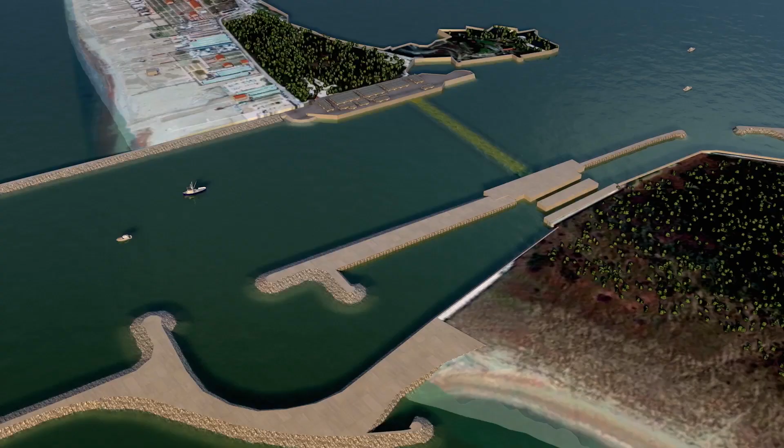For the last 30 years, engineers have planned one of the most ambitious moving dike projects in the world, dogged by indecision and scandal. Today, the MOSE, the mobile seawalls the city never needed in the past, are almost ready to be used.

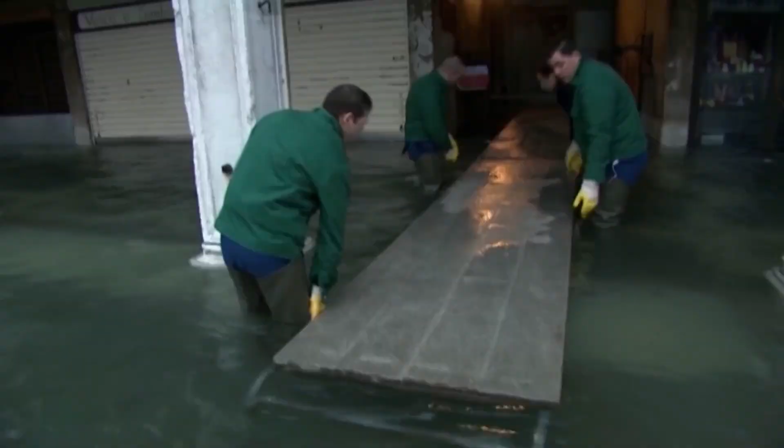The architectural treasure that is Venice is threatened by the very element that made it prosper in the past: water. Its position and wealth have been its ultimate downfall. With a dwindling population, the city is literally being broken down by tourism and climate change. But saving Venice has become a World Heritage priority, and billions are being spent to stop the rot.

Over the last century, the once proud city of Venice has suffered the humiliation of a declining population, the invasion of new barbarians dragging trolley suitcases up and down its streets. Huge cruise liners, whose wake flattens the lagoon sea floor.

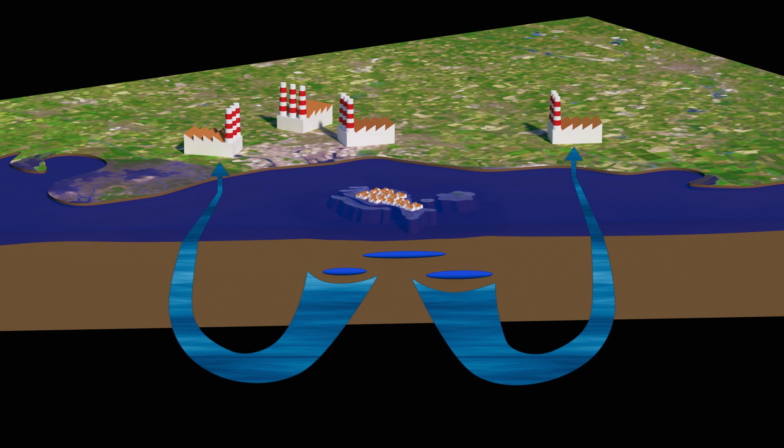And periodic flooding by the waters of the lagoon itself, as overuse of the subterranean aquifer has caused the city to subside. In adverse wind and tide conditions, the Adriatic Sea pushes into the lagoon through the 3 openings of Lido, Malamocco and Chioggia, and raises the sea level just enough to flood the streets and homes of this ancient city.

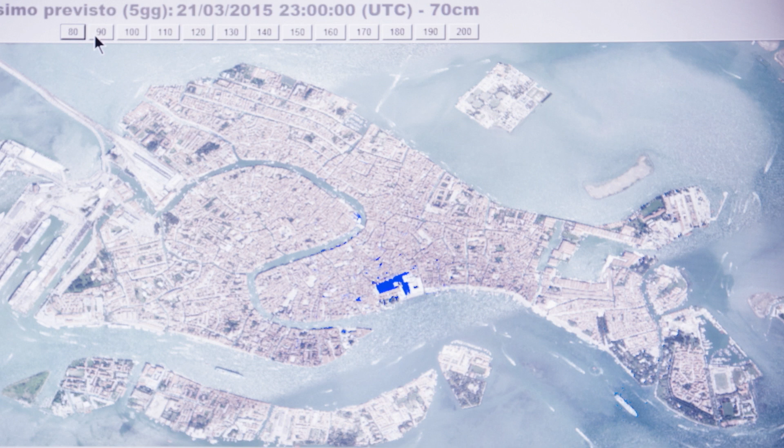Some tourists may find the flooding of St. Mark's Square fun, but the heart of the most romantic city in the world is also the lowest point of Venice, and the flooding causes inestimable damage to the foundations of St. Mark's Cathedral, one of the most ancient in Italy.

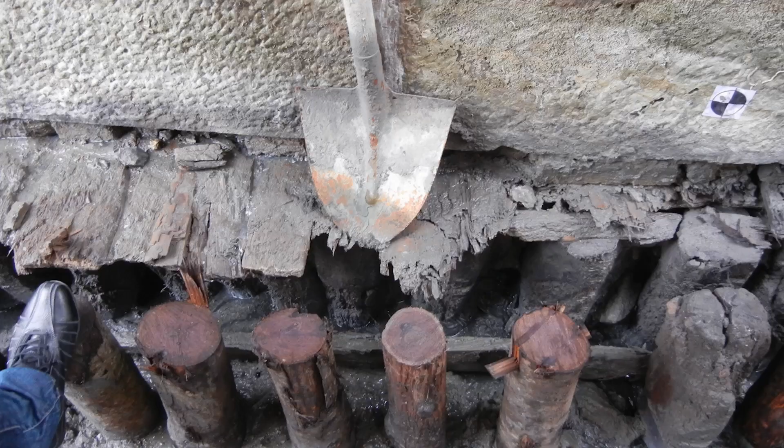Once the water rises above the level of the special marble used by the engineers who built the city over the centuries to provide insulation of the brickwork, then the facades of the buildings begin to suffer dramatic erosion. These buildings are designed to be light, as they stand on millions of wooden piles, so any damage to the brickwork can cause structural damage too. The high waters are eroding not just the foundations of the city, but some of the world's most beautiful works of architecture.

The lagoon is an ecosystem in danger. Not only the city, but the hundreds of islands and wetlands that make up this unique landscape risk being lost forever, with the added complication of rising sea levels.

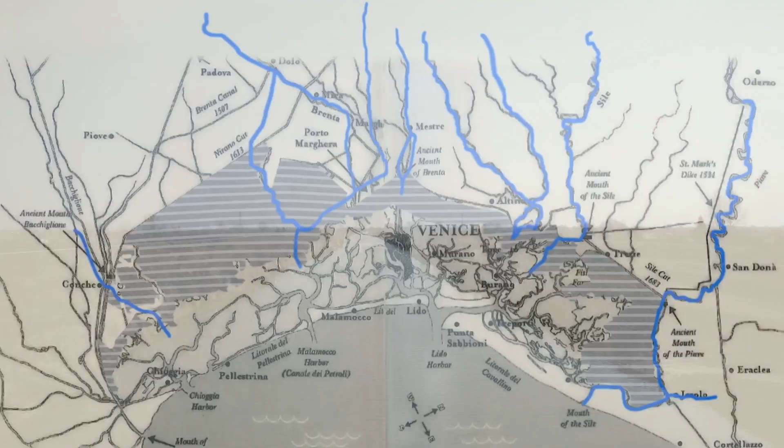Bounded in the north by the river Sile and in the south by Brenta, for centuries the Venetians fought a battle to stop the lagoons silting up, even deviating the course of inland rivers. Access to the sea was Venice's source of power, and the lagoon was its natural defense.

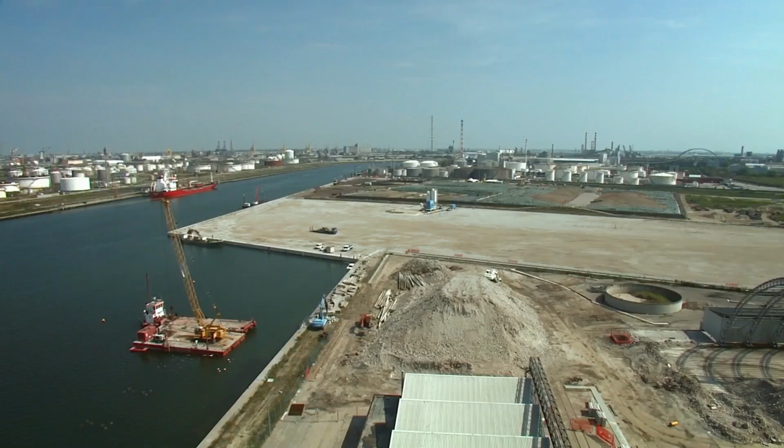In the last 30 years, the situation has been reversed. Trade now goes to Marghera, the city that drained the water table, and the sea has become a threat. The walls of Venice are the massive floating barriers that will stop the sea from flooding Venice.

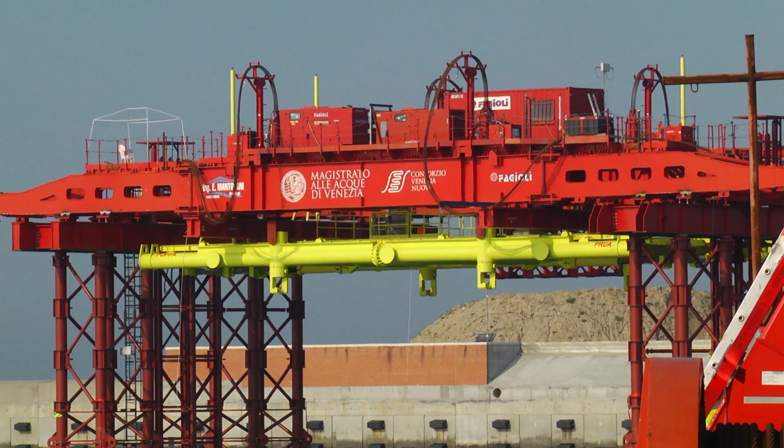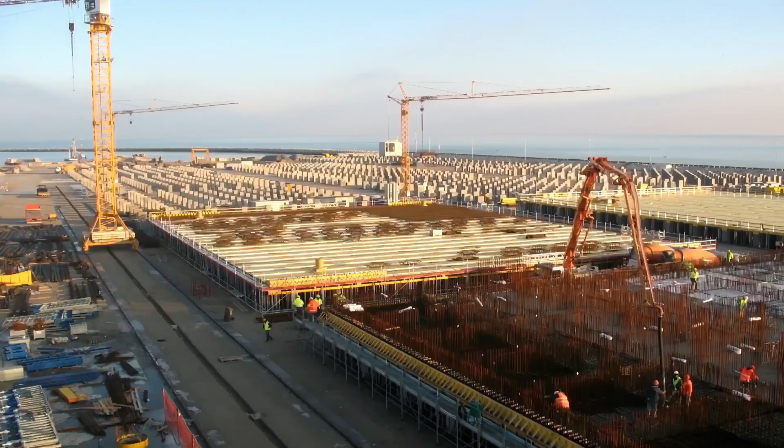Giovanni Zarotti is the lead engineer on the MOSE project. He has seen it grow over the years and now heads up the team that will bring it to fruition. The new Venice consortium of Venetian enterprises has come together to build the MOSE, or Modulo Sperimentale Elettromeccanico, the floating walls that will defend Venice from high waters.

MOSE is a project that began after the events of 1966, with the exceptionally high tide that caused flooding of huge parts of Venice and massive damage to the city's cultural and monumental heritage. As a result, there was significant intervention to create an infrastructure to control medium-high tides, meaning tides that reach 1.10 meters above average sea level and can go as high as 1.94 meters, as happened in 1966.

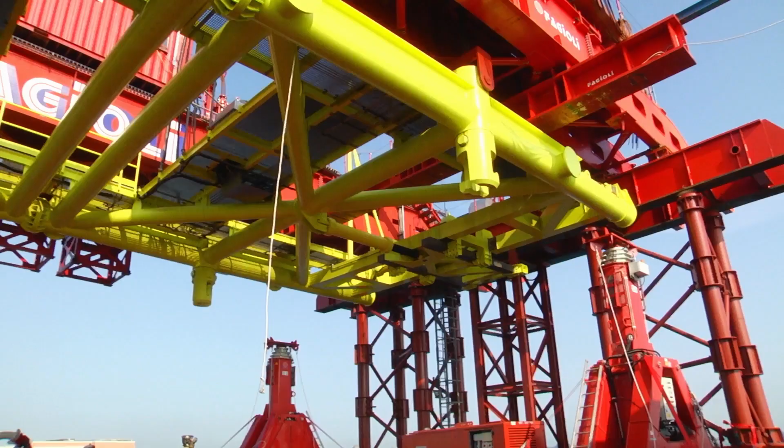Moving the massive engineering parts that make up the MOSE fell to one of the world's leading heavy lift companies, Fagioli. In 2012, the company was engaged by the new Venice consortium to lay the floating barriers and concrete housings that cross the Lido entrance to the lagoon. It was the beginning of the final phase of the MOSE project.

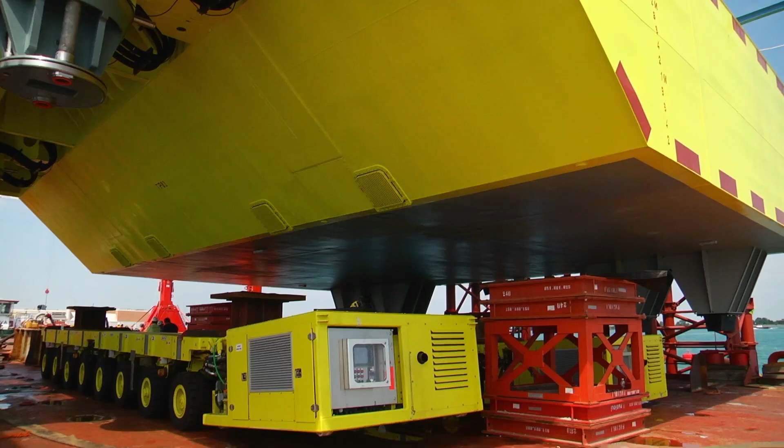However, the Malamocco and Chioggia entrances required extra engineering, as they are even deeper and wider than the Lido entrance. Fagioli's engineer, Tommaso Favaretto, was the lead engineer on the project.

As compared to the previous operation, we added horizontal elements, crosshead beams. We lengthened them to allow us to cover the geometric parameters of the walls of Chioggia and Malamocco. They weigh more and are larger than the Lido Treporti walls. Here we're talking about 400 to 450 tons of weight to move over several tens of meters in length.

The MOSE is one of the largest works of civil engineering built in Italy. Over the last 10 years, it has provided hope that the city can be saved from sinking under the waves.

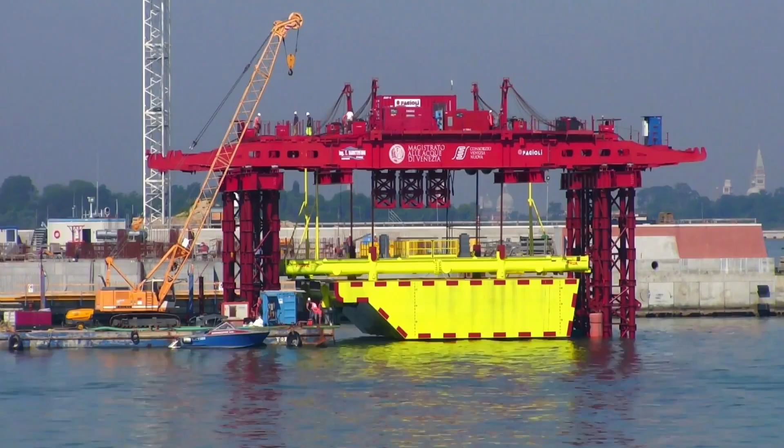The world waits with bated breath to see if the walls of Venice will actually save the city. The project is one of the most complex works of civil engineering ever built in Italy, designed to save the city from periodic flooding.

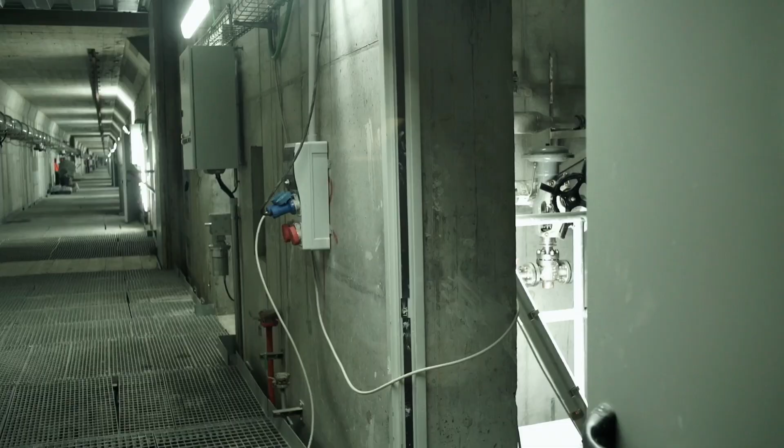The works were officially launched in 2003, and a lot of the work, most of which has already been finished, were works of civil engineering. So, for example, the concrete housings that form the base of the work and the housing for the walls, consolidation work, and the essential infrastructures that the whole project needs, located at the lagoon entrances.

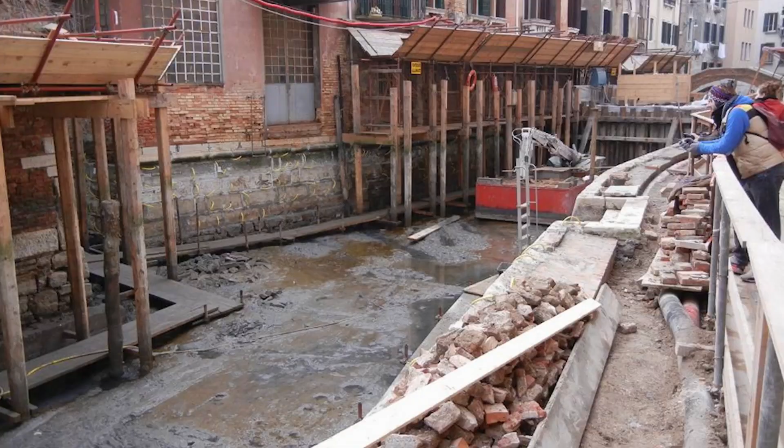The Venice Lagoon is 80% made up of wetlands that are partially submerged, and only 8% is made up of islands, while the city of Venice is actually held together by millions of wooden piles pushed into the mud and sand.

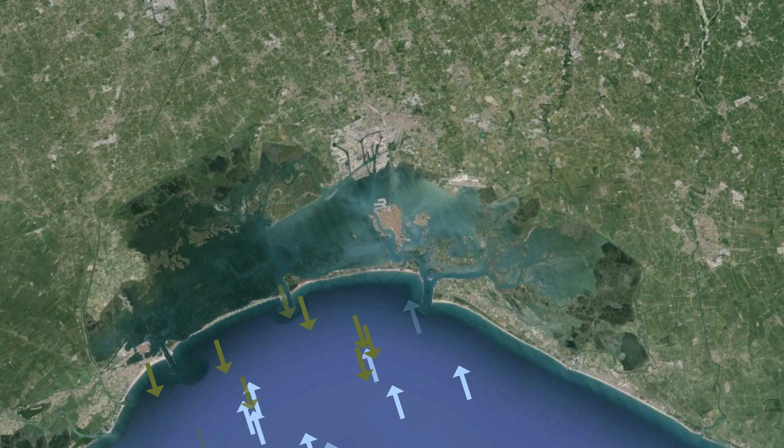The tides that so threaten the city are also its only real drainage system. Twice a day, clean water enters the canals and dirty water is taken away. As a result, there were several prerequisites for the MOSE that the designers undertook to respect, not only to maintain the overall visual aspect of the lagoon, but also to ensure free exchange of water between it and the open sea.

So we began the planning process, but the Italian government set a certain number of prerequisites for construction, and there are two main ones: that the construction should have a low visual impact and should not greatly modify the overall aspect of the lagoon. The second was that it should not substantially change the hydrodynamic exchange between the open sea and the lagoon. Later, the plan involved restoring the natural ecosystem that contributed in the past to slowing down the flooding process.

Access for ships and seawater into the Venice Lagoon is through three openings in the long sandbank that makes up the barrier with the open sea. The openings are at the Lido of Venice, at the small fishing village of Malamocco, and in the south of the lagoon at Chioggia.

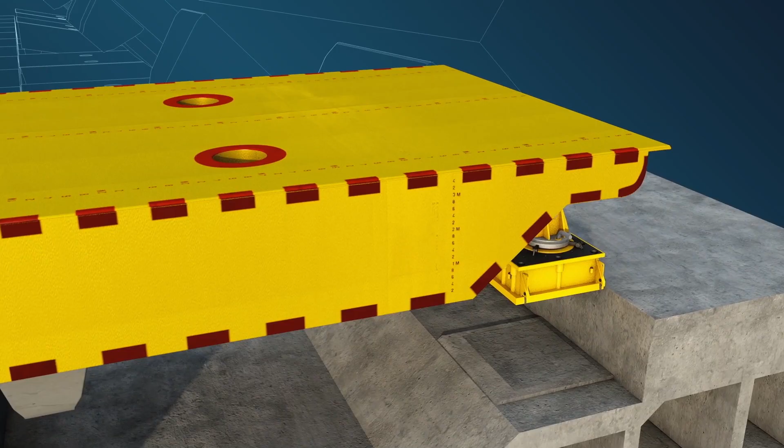The MOSE concept is based on a system of floating barriers to close these 3 openings when adverse wind and sea conditions are forecast. They are massive steel walls that can be filled with compressed air when necessary, rising to the surface, making a floating wall.

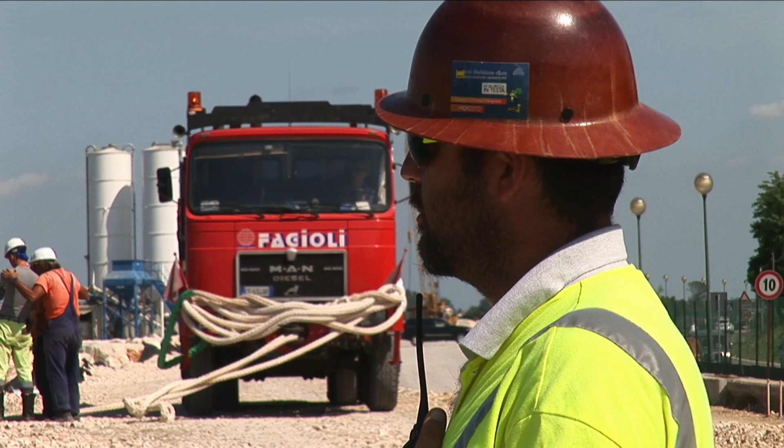In 2013, the first mobile walls were installed at the Lido entrance to the lagoon. This entrance was so wide that it was artificially divided into 2 to allow easier management of the massive structures.

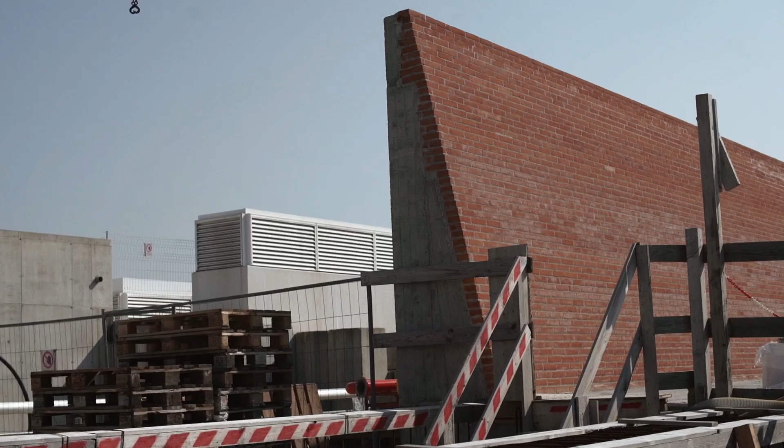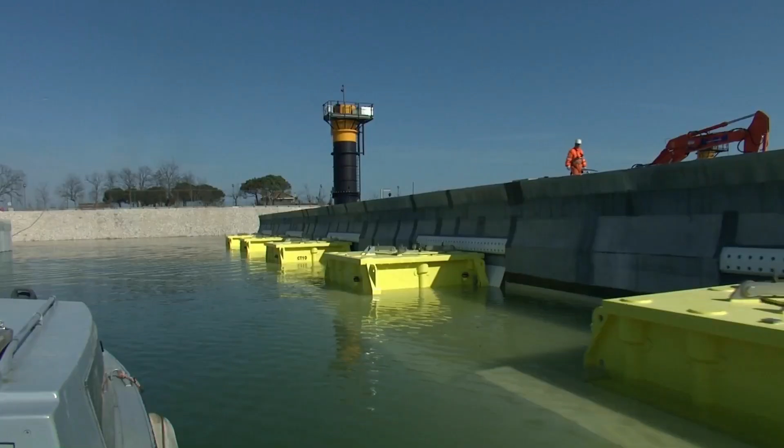In these extraordinary images, dating back to the first campaign to lay the caissons, the concrete housings for the barriers, we see the area where the housings were built being flooded. One by one, the caissons were pumped with air and floated.

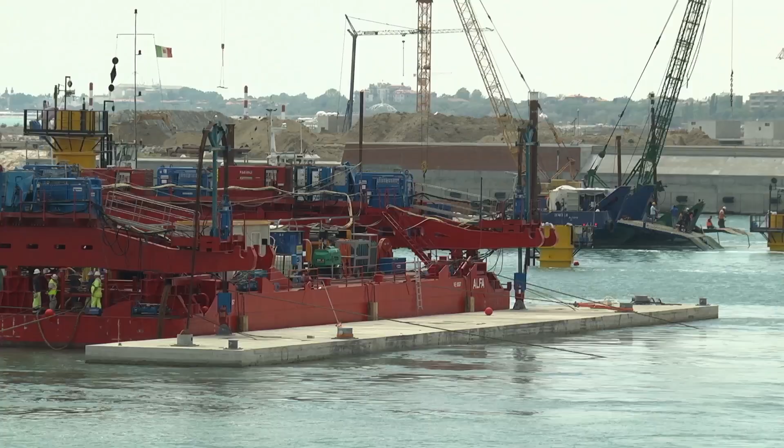Fagioli used a special catamaran to position each 12,000-ton concrete housing over the 12-meter deep trench dug into the sea floor, where 4 300-ton capacity strand jacks lowered it onto bags that were slowly emptied to provide the soft landing needed for absolute precision.

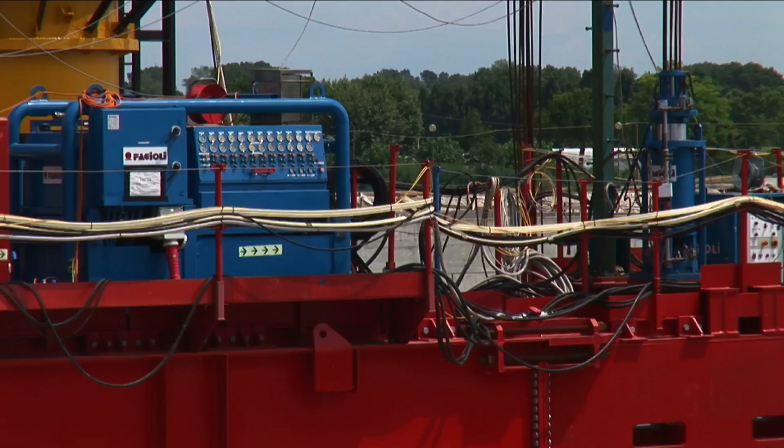The exact location of each caisson was guaranteed using GPS positioning and radar. It was one of the most complex moves Fagioli had ever carried out.

The housings were prefabricated in an area that was drained of seawater. So they were built on the bottom of the sea, and they are cellular housings, made of concrete walls, but partially empty inside, so able to float.

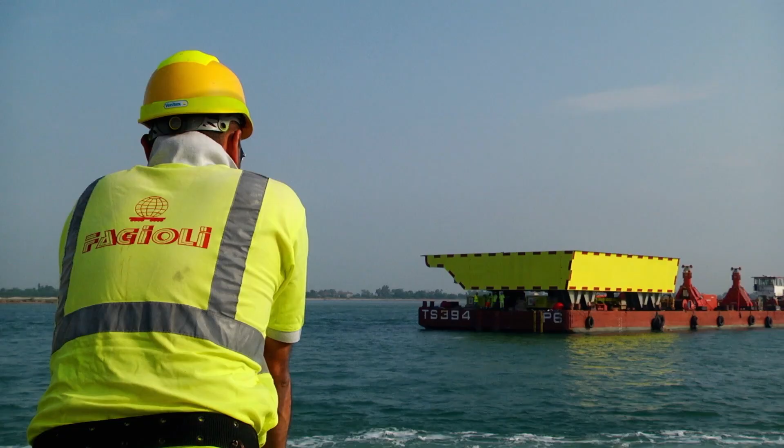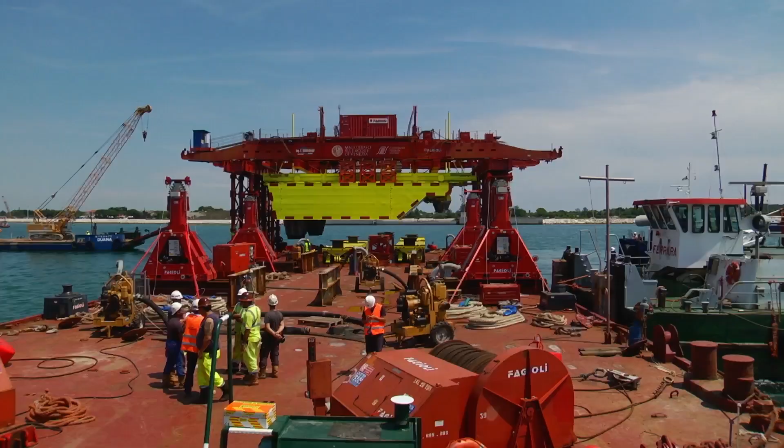Then the walls themselves were laid. They weighed 210 tons. They were floated out to the location above their concrete housings on a barge, and then lifted by a specially designed gantry crane and lowered into place so that they fit perfectly onto the hinges.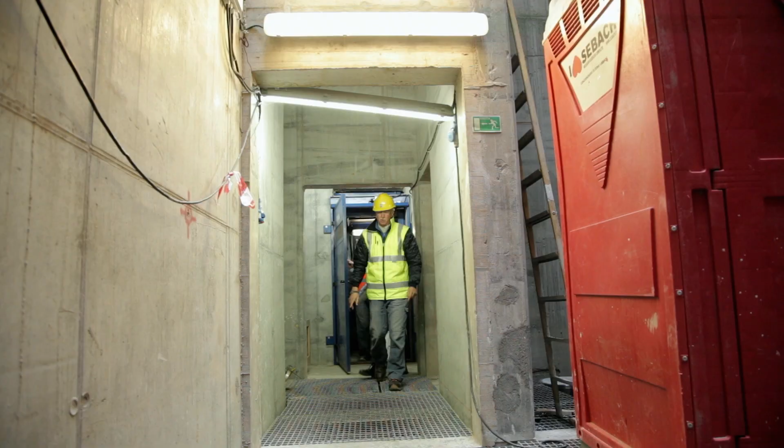In a rare visit to the underwater bunkers, located more than a dozen meters under the surface of the lagoon, the actual configuration of the concrete housings for the mobile barriers can be seen. A tunnel with lifts at each end allows for regular inspection of the hydraulics and electric systems that are at the heart of the MOSE.

Each hinge is housed in its own room with watertight access doors. A reserve tunnel ensures there is access under all conditions, even when the bunker-like construction is flooded.

Malamocco is a pleasant fishing village on the strand that separates the Adriatic Sea from the Venice Lagoon, and is also the place where hundreds of ships pass through every year to get to Porto Marghera, the great industrial and petrochemical hub of northern Italy.

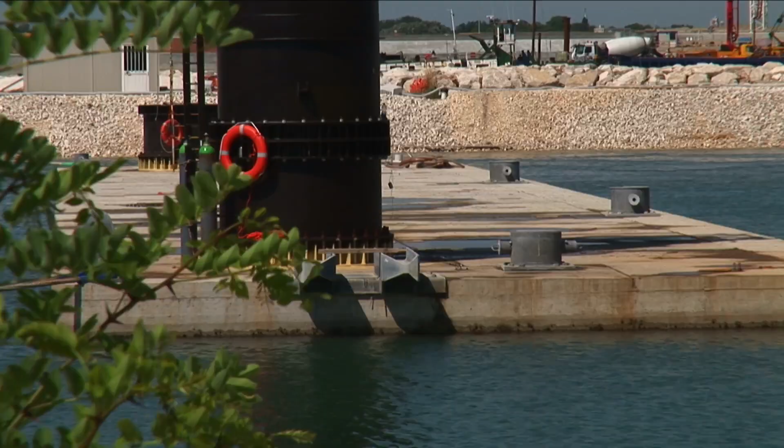The channel is particularly deep, and the caissons, or bunkers, were built close by as they were particularly heavy. While at Lido, each of the caissons is able to house 2 barriers, here each concrete underwater bunker houses 3.

At Malamocco, the system used was different, although the housings were essentially the same. They were built on a bank above sea level and then moved via a system of rollers and taken to the synchrolift, a kind of massive elevator that lowered them into the sea, and then they were floated away and tugged to their final destination, and then sunk again.

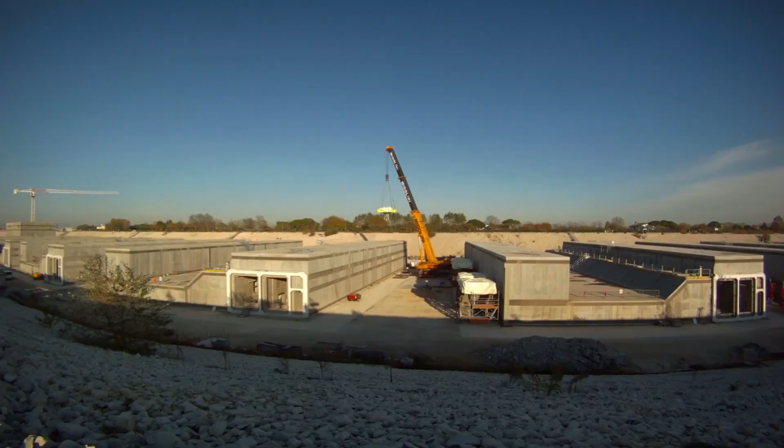Building such a huge work of civil engineering was easier said than done. The concrete structures built at Malamocco first had to be lifted and then moved onto the huge synchrolift crane.

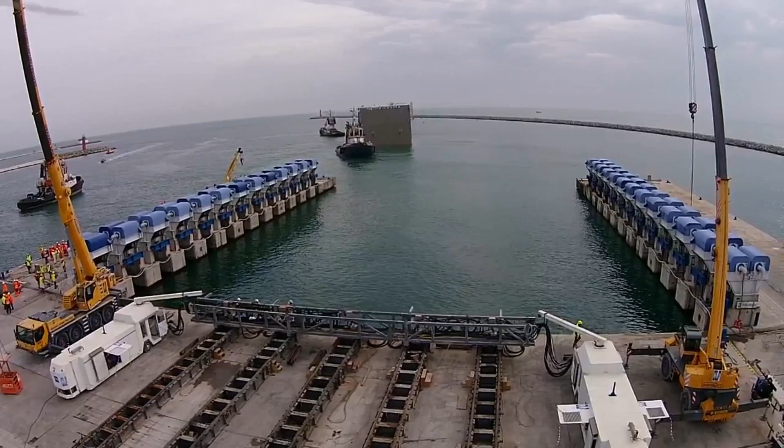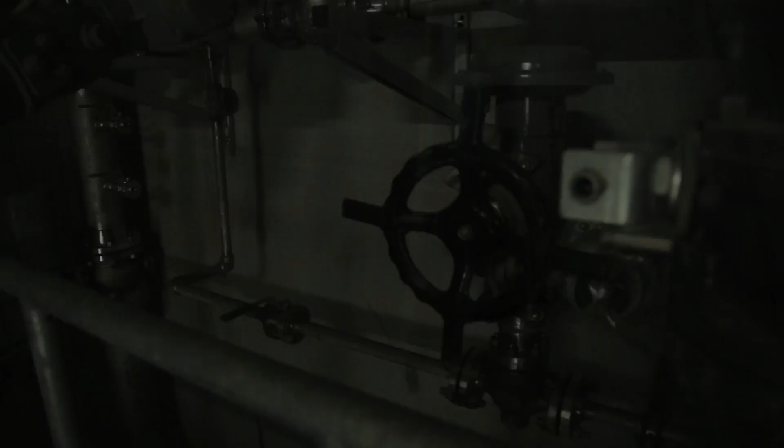Then they were lowered into the water to be tugged out to the open sea and dragged to the place where they were to be sunk. The sea floor had to be specially prepared to house them, so that their roofs were flush with the natural depth of the sea in those locations. Then they had to be emptied to allow access to workers to prepare the electrical wiring and compressed air pipes that activate the enormous floating walls.

The size of the housings varies from one lagoon entry to another, but the largest are 60 meters long, 40 meters wide, and 12 meters high, and the whole of the height has been encased level with the seafloor. Weights differ too, but we are in the area of 22,000 tons of concrete.

The barriers have a very important element, that is, the hinge that allows them to rotate and also receive all the service piping that carries air, that make them rotate and float. So there are corridors that allow them to run through the housings.

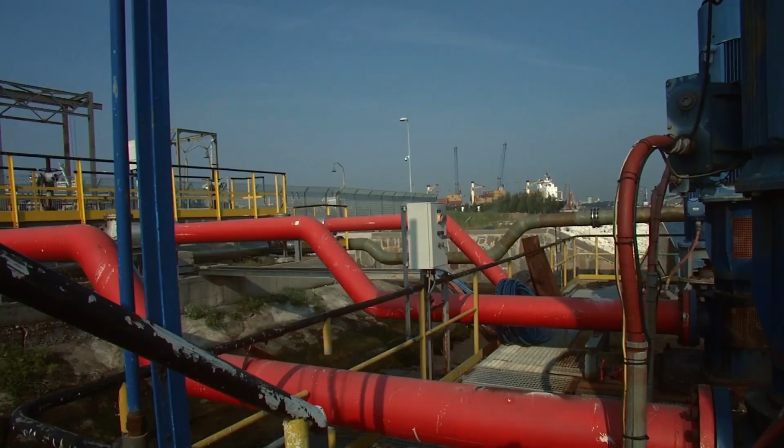During the whole time, ships continued to enter and exit the lagoon along the deep channel carved into the lagoon floor to allow tankers and cargo ships to reach Porto Marghera, one of Italy's great industrial cities. It is close to Venice, and the wake of the ships contributes to flattening the lagoon floor, which in turn speeds up the flow of floodwater.

To combat this, the New Venice Consortium is rebuilding a system of islands and wetlands that are designed to not only slow the floodwaters, but also to encourage the return of wildlife.

Among the projects promoted by the state, by the Commission for Public Works and the former Inland Waters Office, or Magistrato delle Acque, and taken forward by the consortium, was also the reconstruction of the wetlands, areas of land that are covered by water during high tides, but emerge at low tide, that are home to unique flora and fauna. Apart from preserving habitats, these areas also make the hydrodynamics inside the lagoon more efficient.

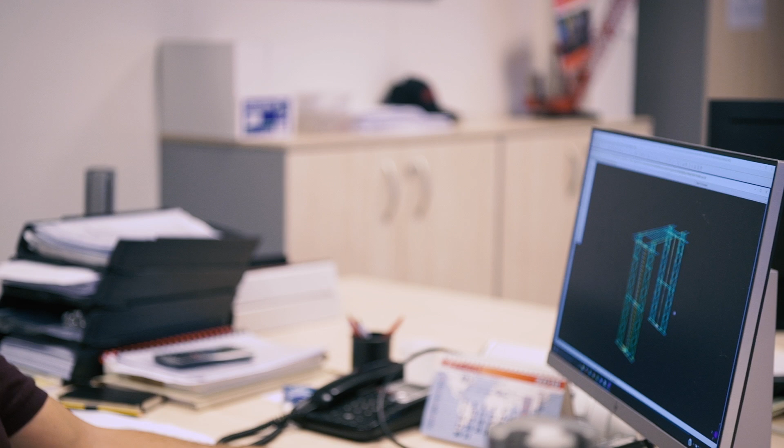Here at the Fagioli headquarters near Reggio Emilia in northern Italy, engineers are working on the technical specifications of a gantry crane that is soon to be handed over to the New Venice Consortium to allow the regular maintenance of the floating barriers that have become Venice's new walls.

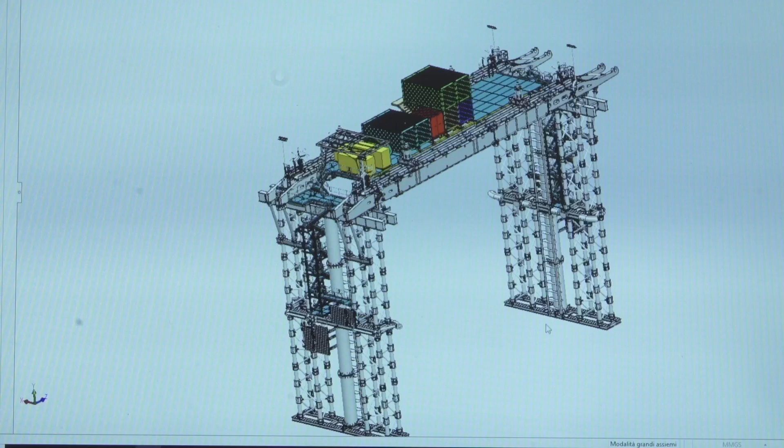The Fagioli engineers, however, had other concerns. Their new gantry crane had to be tall enough to reach the deeper caissons of the Malamocco and Chioggia openings, some 14 meters deep, and at the same time be small enough to be safe and stable on the barge.

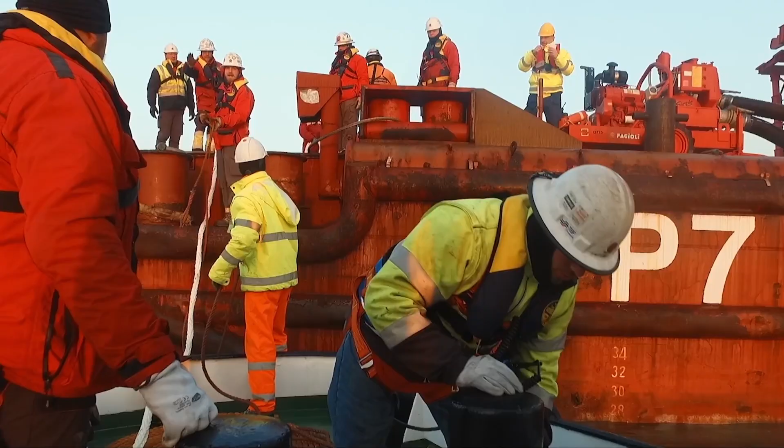The openings of Chioggia and Malamocco are deeper.

Malamocco, which is the deepest, is 14 meters deep, between the surface and the top of the housings.

It was also necessary to raise its height, so we needed to make the crane taller, adding several meters of leg length. Compared with the previous 9 meters, we had to add 6 more meters of trellis tower.

An engineering complication made their lives even more difficult.

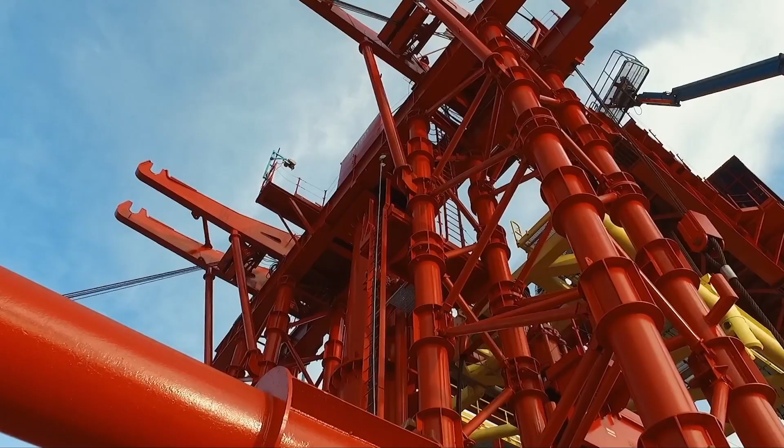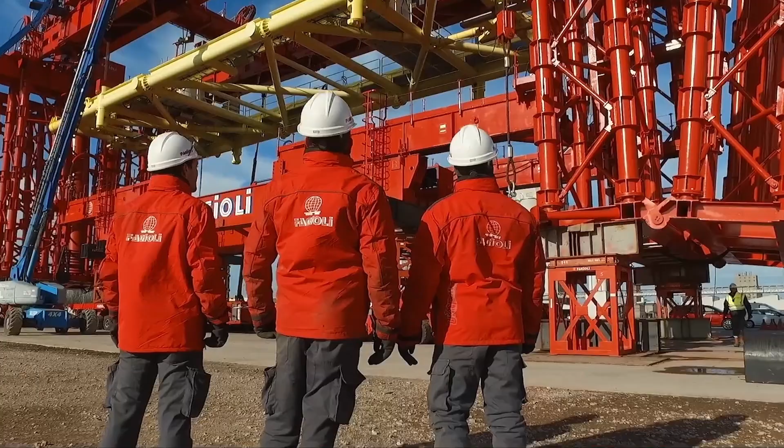This gantry crane was built especially to lay the 37 walls that make up the barriers at Malamocco and Chioggia. The massive trellis structure had to be able to lift the larger floating barriers that weighed more than 400 tons and were wider than the Lido barriers. The calculation of the forces applied to the different parts of the crane had to be precise, especially because the crane had one potentially weak point.

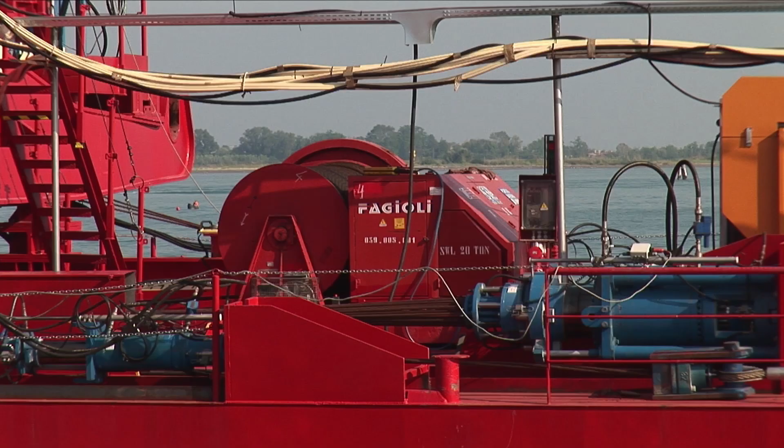The special tool that the Fagioli engineers have at their disposal is the strand jack, the hydraulic jack that is able to slowly lift hundreds of tons of weight, using a concept that is simple in itself but highly complex to build. A strand jack is a hollow hydraulic cylinder with a set of steel cables, the strands, passing through the open center, each one passing through 2 clamps, one mounted to either end of the cylinder.

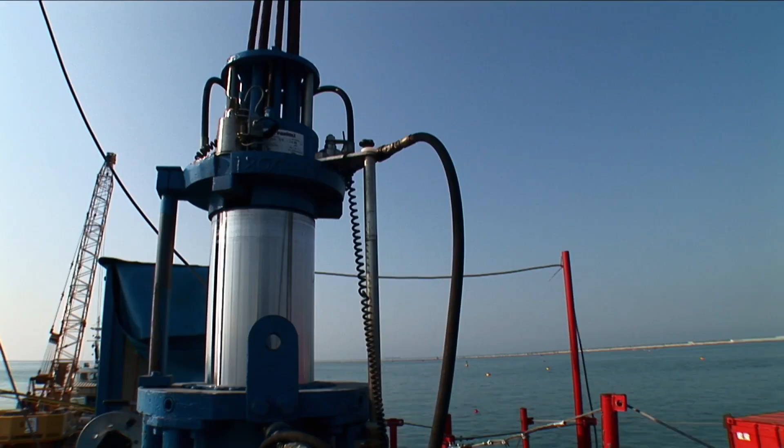The jack operates in the manner of a caterpillar's walk, climbing or descending along the strands by releasing the clamp at one end, expanding the cylinder, clamping there, releasing the trailing end, contracting and clamping the trailing end before starting over again. The real significance of this device lies in the facility for precision control. When many strand jacks are activated at the same time under the control of a central computer system, the lifting power of each individual steel strand can be multiplied infinitely.

Fagioli famously supplied the near 100 strand jacks that rolled the Costa Concordia onto the artificial seafloor so that it could be readied for refloat.

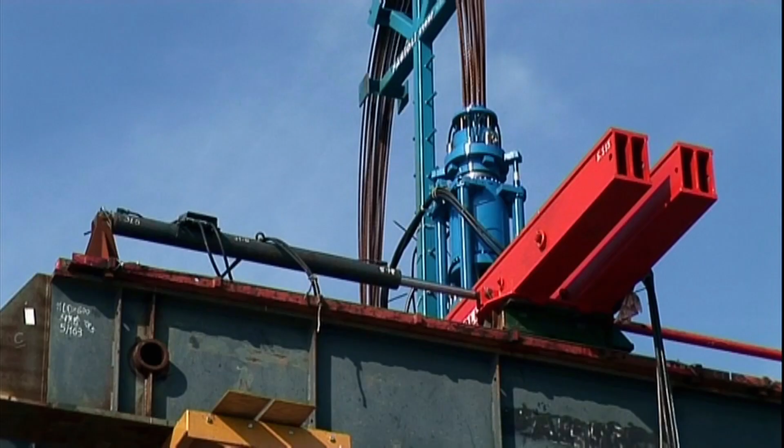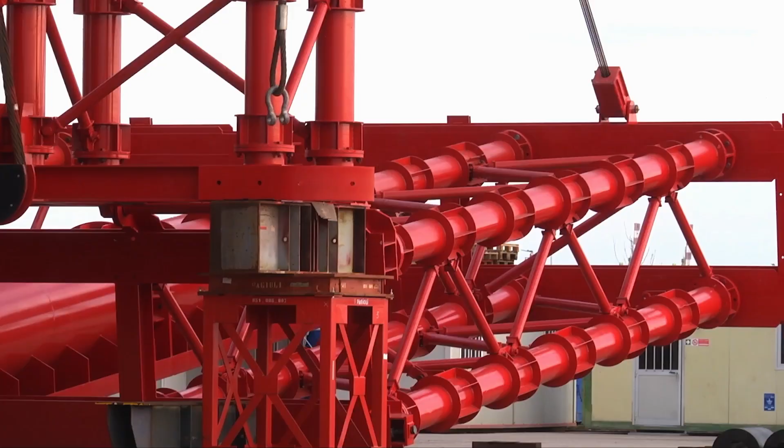Fagioli designs its own strand jacks, and on this entirely new gantry crane, the sets of strand jacks did different jobs. The folding legs needed 4 strand jacks each to open and close the joints.

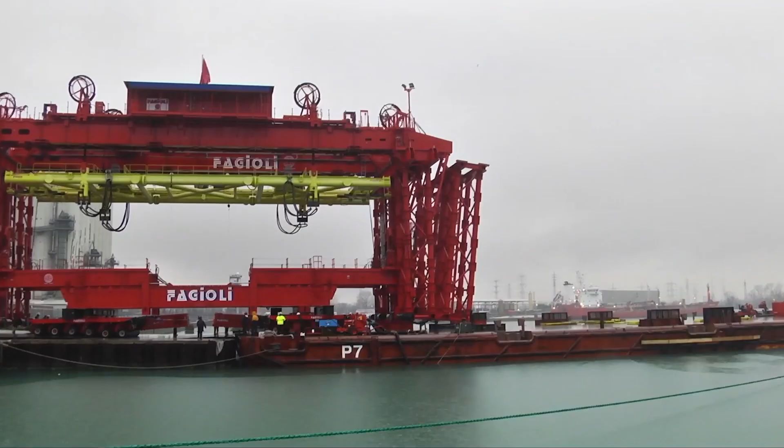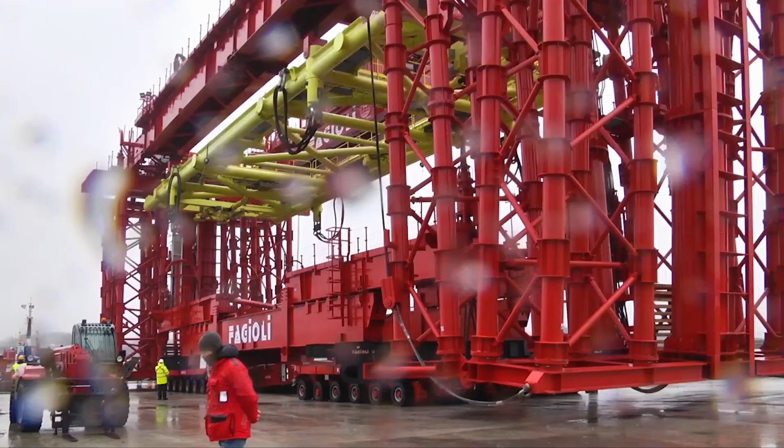Getting the gantry crane onto the barge was a specially difficult task. Luckily, Fagioli also owns hundreds of SPMTs, self-propelled modular transporters, that not only are modular, so can be as long or as short as needed, but can also lift their loads. Fagioli uses SPMTs in all their heavy lift operations.

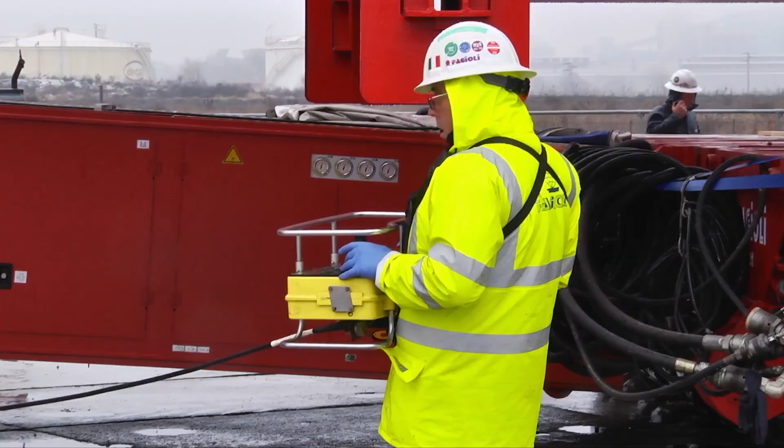SPMTs are modular, wheeled flatbed vehicles that are remotely driven and maneuvered. They are able to move in any direction and even rotate, as each set of wheels is independent. They can be as long or as short as the user wants, as well as hydraulically raising their load.

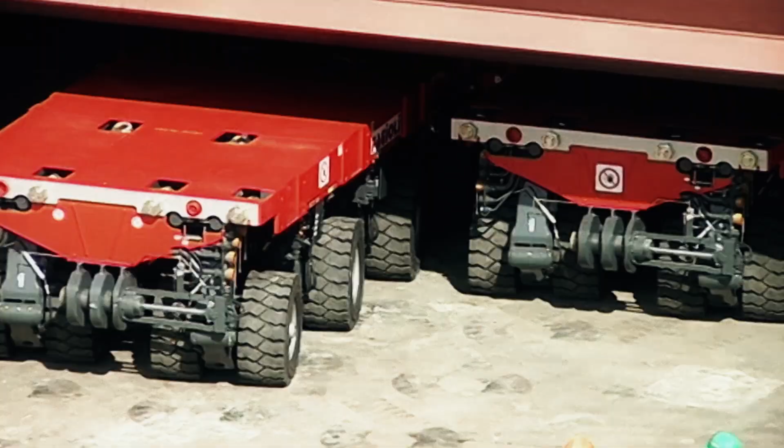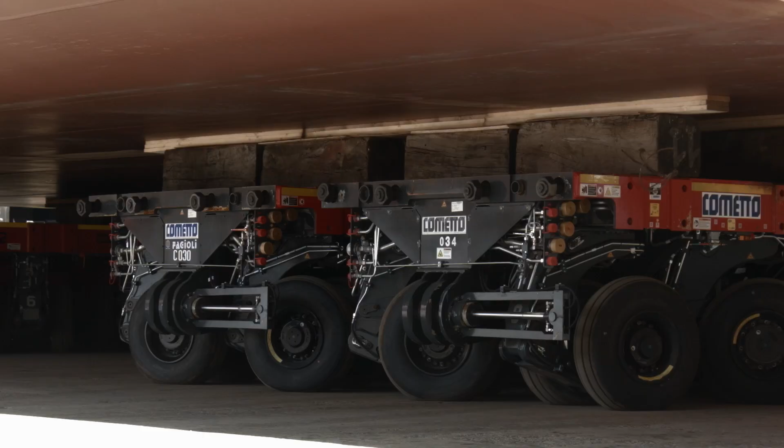They are seen here moving the whole center section of a ship that has been lengthened by slipping this new segment into the middle. The versatility of the SPMTs is shown by how the wheels swivel 90 degrees to move the load perpendicularly to the original direction of transport.

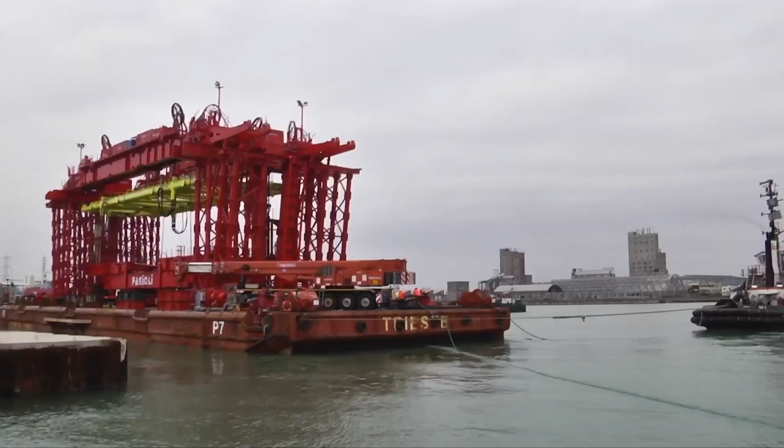It could now be taken to the construction site closer to where the floating barriers were to be laid. A special transport beam was loaded with it, so that once on site, it could be raised and lowered as needed.

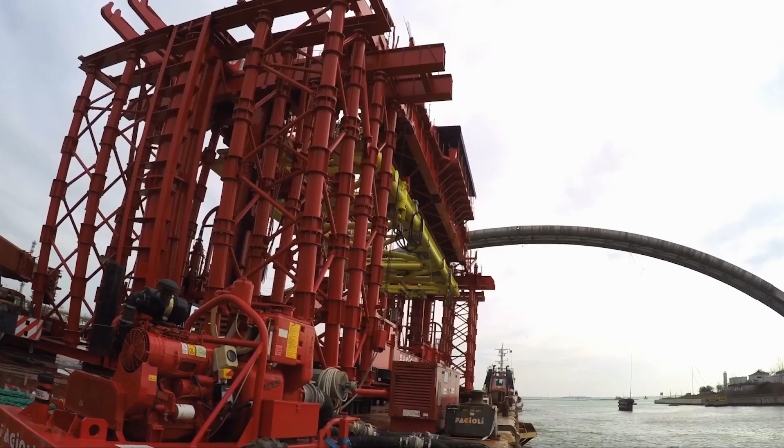Now came the delicate moment of actually taking the crane to the location of the massive concrete caisson.

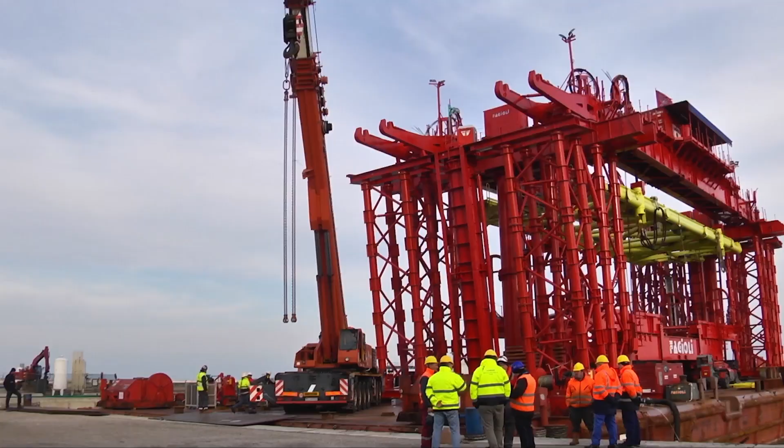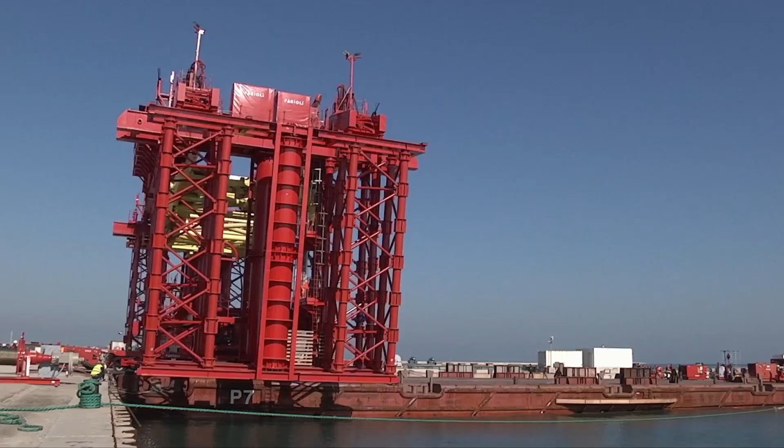Once we reached the worksite, the crane was disembarked and turned 90 degrees into the installation position. Then it was re-embarked in the installation position and then taken to the point above the concrete housing where the first barrier, or the barrier in question, was to be lowered and then set up.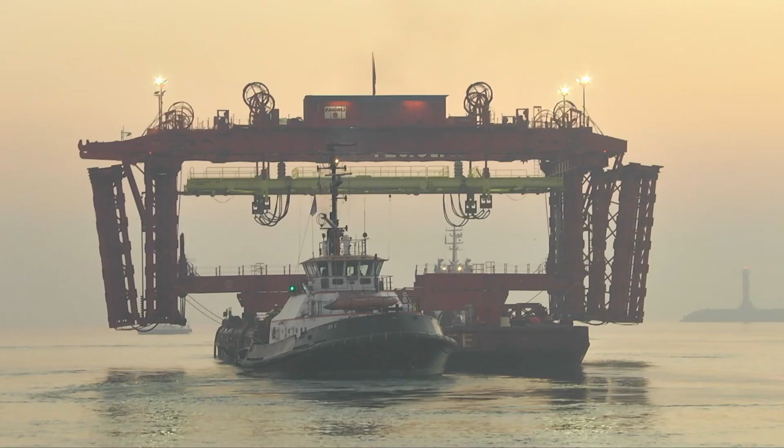The barge made its way to the pre-established site over the caisson hinge where the floating barrier was to be placed. It was then held in place by cables attached to posts, and the barge's pilot's job was now to keep it stably in the same place, using a joystick that pulled on the cables to counter any current or wind.

The barge with the gantry crane on board was then anchored using cables attached to winches, and the cables were attached to foundation poles located at the lagoon entrances.

And the positioning of the barge was managed using a positioning software based on GPS and regulated by pulling on the cables by winches until the gantry crane was in the correct position for the barrier to be laid over the housing.

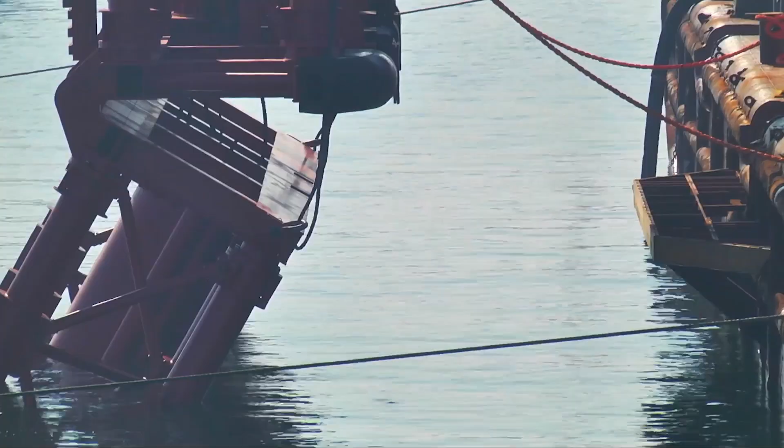This time, the legs had to protrude over the side of the barge so that they could be unfolded and lowered into place. Neoprene pads had been attached to the bottom of the legs so as not to damage the concrete surface of the caissons. The strandjacks pulled open the legs, which were then locked to provide maximum stability.

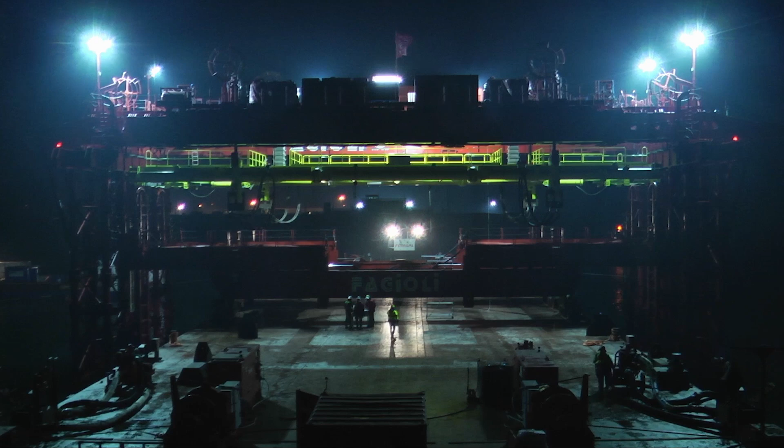The lifting device lowered the gantry crane onto the surface of the caisson. The gantry crane was equipped with a centering cone located in the base of the frame, which is a male part that's wedged into the receptacle on the surface of the concrete housing.

Once in position, the gantry crane is lowered until the male cone, that's on the foot of the crane, enters into the receiving cone located on the housing surface.

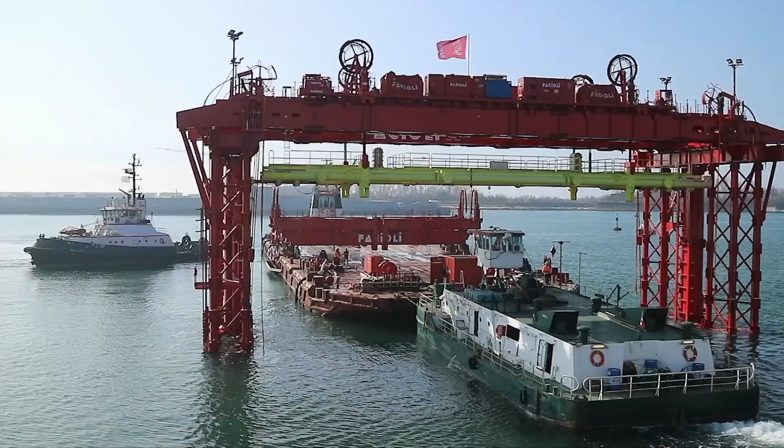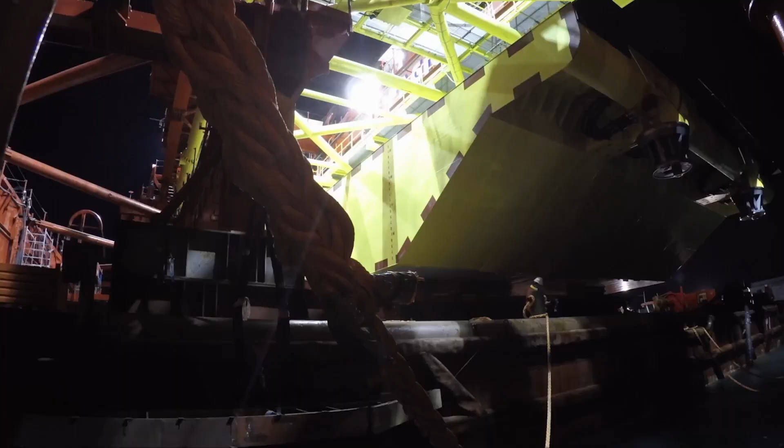The barge was withdrawn and went to collect the huge yellow floating barrier that had to be placed on the underwater hinge. The fishing beam was lowered by four 300-ton capacity strandjacks, and once the barrier was safely attached using electrically operated couplings, it was raised, and once again the barge could slip away, leaving only air and water between the barrier and its place of final location.

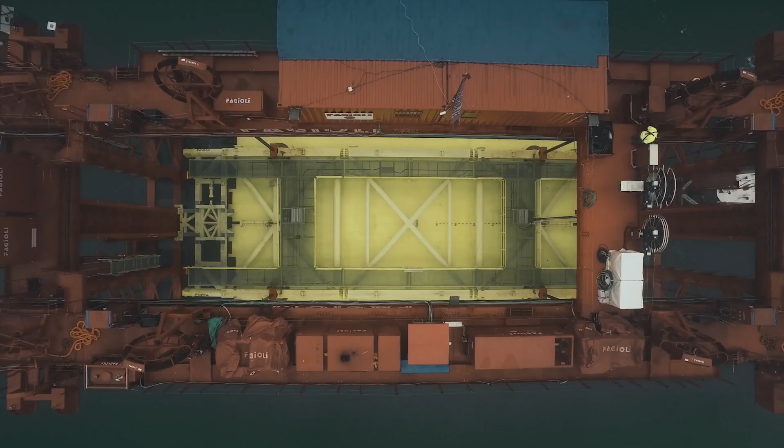So the barrier is attached to the fishing beam that's attached to the gantry crane via strandjacks that allow vertical movement. The fishing beam is equipped with hydraulic systems that push against the gantry crane to allow for horizontal movement, so we get millimetric positioning both vertically and horizontally.

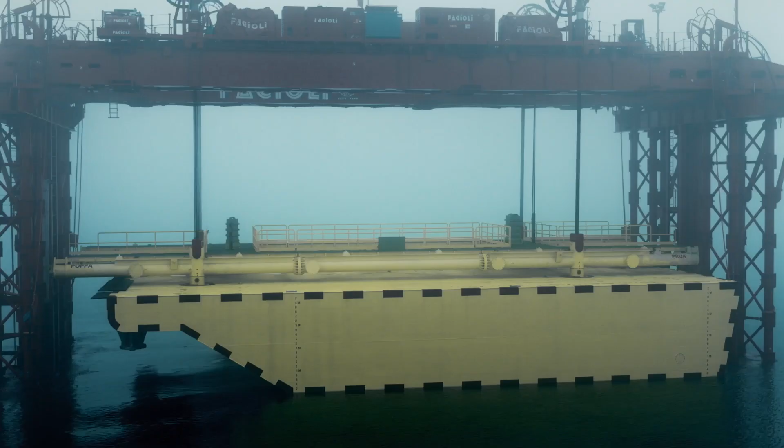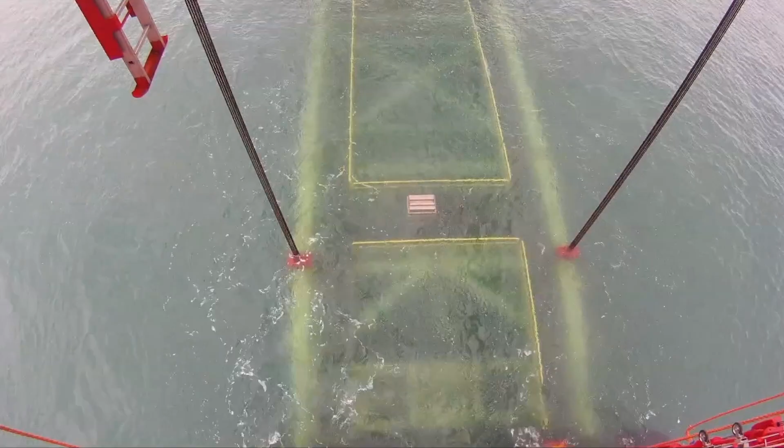Slowly but surely, the fishing beam lowered the floating barrier 14 meters underwater until the male part of the hinge fitted snugly into the female receptacle where it could be fixed. The fishing beam could be withdrawn once again.

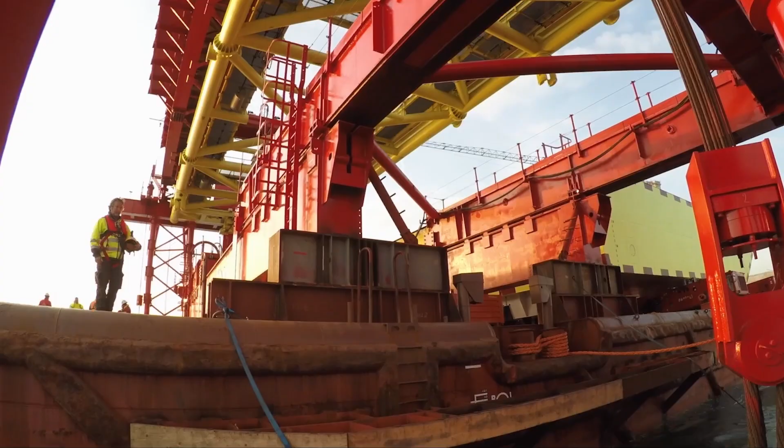However, the whole operation involved laying floating barriers in as little time as possible. So as soon as the first was fixed in place, the transportation beam was brought out on the barge, and once again, the gantry crane was lifted out of the water. The strandjacks pulled up the legs, and once again the barge was tugged to the next position.

Laying the MOSE floating barriers took months, in every kind of weather that the Venice Lagoon could throw at the equipment and the men. In all, there are 78 barriers, but more were actually built because there are 2 spare barriers for every lagoon entry. And the reason for this is that these barriers will have a periodic need for maintenance. So, in order not to leave the place where the barrier has been removed without one while it is being repaired, the extra and identical barrier is positioned there as soon as the barrier due for maintenance is removed.

Let's say that the operating conditions for the machines were very severe and were respected. During operations, the humidity, the rain, the cold of winter still exist, and people who work on site get sun when it's sun and rain when it's rain.

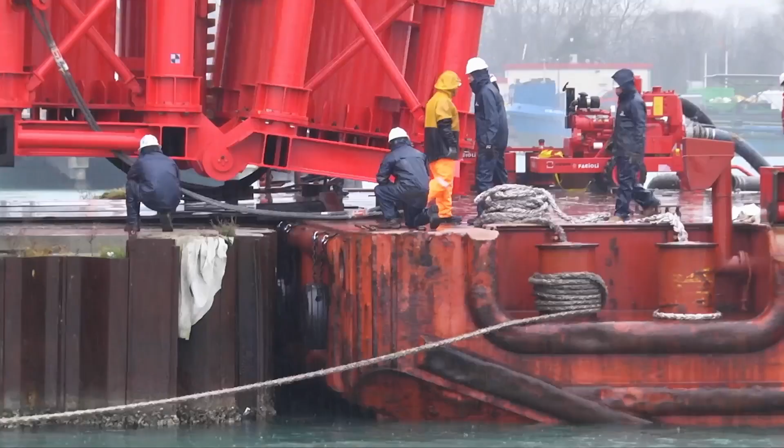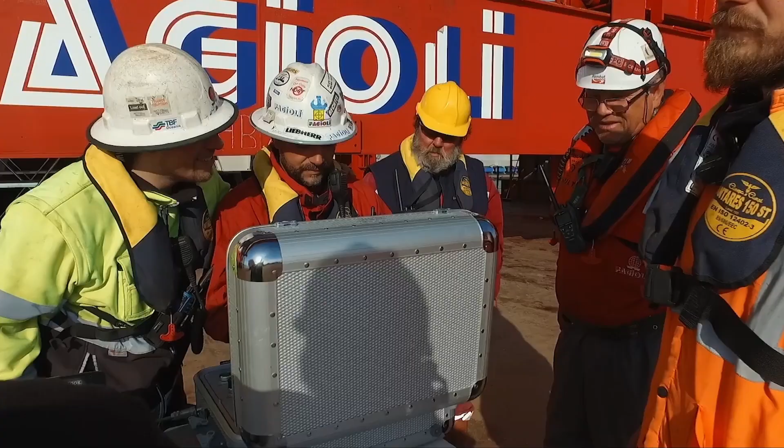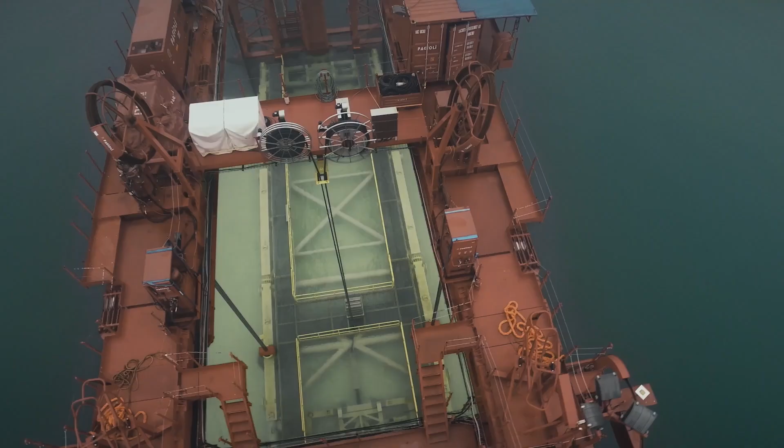Each operation required up to 15 workers to maneuver the massive gantry crane that Fagioli had specially built to do the job. Worker safety was one of the chief priorities of the company. As the seasons came and went, the floating barriers of Chioggia and Malamocco were securely laid, and the great civil engineering project approached completion. The next steps involved testing it.

The MOSE floating barriers are already in operation in experimental mode at Treporti, to check they work and in order to set activation parameters. Here, all 21 barriers have been laid, and they have been raised several times, and so the entrance closed several times.